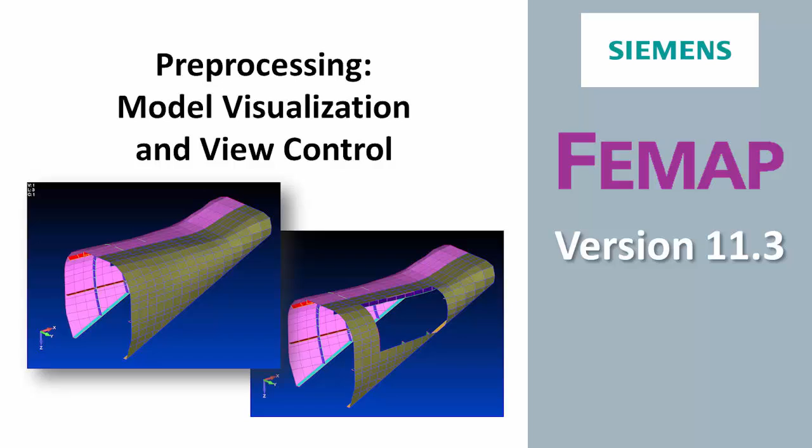In this video we'll be looking at some of the new pre-processing enhancements for model visualization and view control, starting with the Draw Erase toolbar, which provides a simple way of displaying or hiding parts of the model. Sometimes called Plot Erase or Show No Show, Draw Erase is a quick way to turn on or off parts of the model without having to set up groups or layers. Let's use this sample model to see how it works.

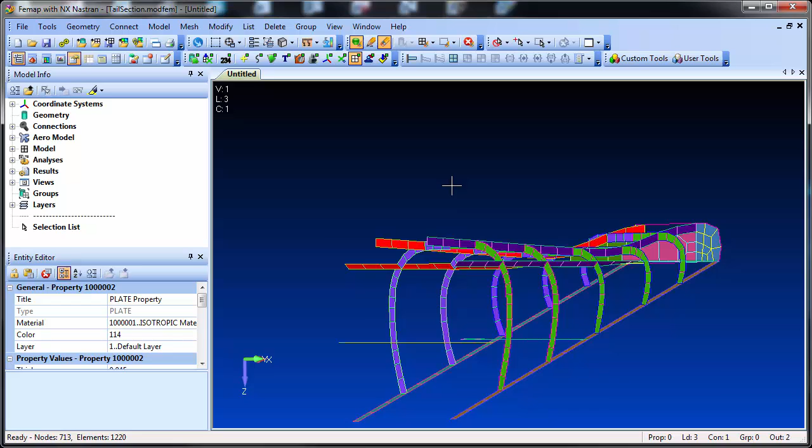The Draw Erase toolbar can be set to be active or not, and you can use it to draw or erase geometry or elements according to various criteria such as materials or properties. In this case, we're switching off elements that have a particular property. You can also flip between what's drawn and erased so that entities that were drawn are now erased and vice versa. And once you're done, you can easily reset the tool.

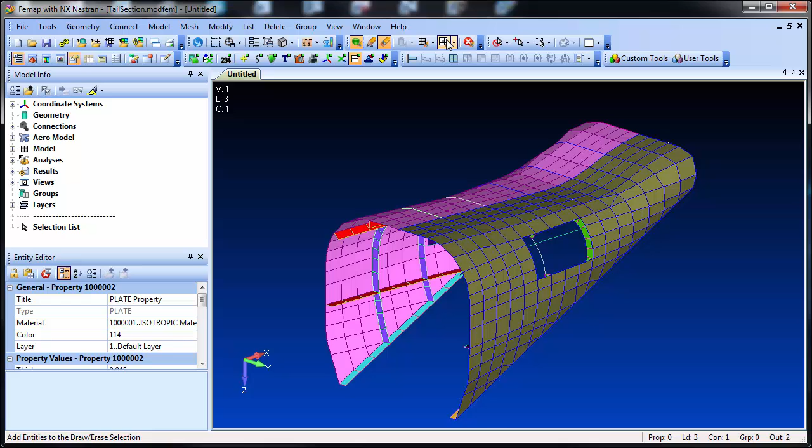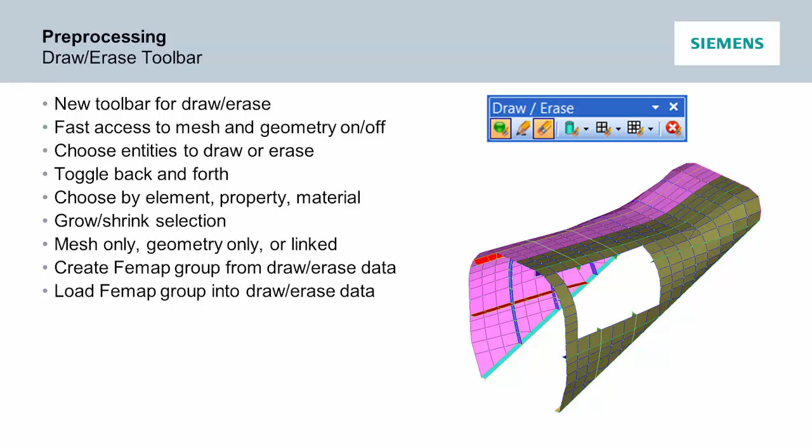There's also an element mode if you want to select elements one at a time, and there are some other tools such as growing, allowing you to grow or shrink the erased section interactively. Draw Erase provides an easy way to hide part of the model to allow you to look inside. Other capabilities allow you to link the geometry and mesh, so if you turn off geometry, all the associated mesh will turn off at the same time. You can also save what you're viewing into a group for use later on, and you can load an existing group into the Draw Erase tool.

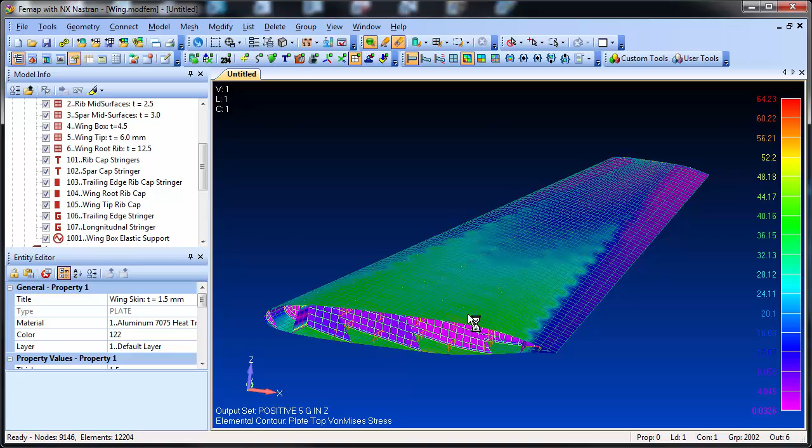In previous versions of FEMAP and many other pre- and post-processors, when you zoom into the model, you just keep getting closer to the view of the outside elements or geometry. You never go through or into the model. Walk-through is a mode where you can actually go into the model, turn around, and see what's behind you. This greatly aids visualization as you can view the interior of the model without having to create groups of entities to hide or blank off.

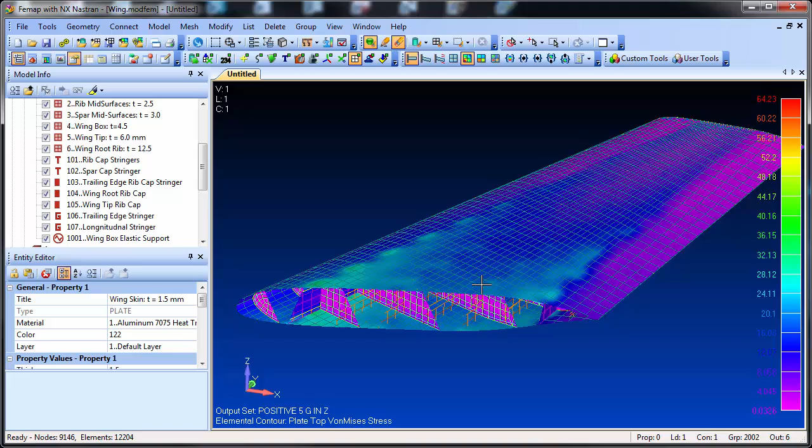Let's take a look at this wing model. By zooming in, we can now get inside the wing and turn around and view the structure that's behind us. You can also view results and deformations in this mode, and see the results as they are inside the model.

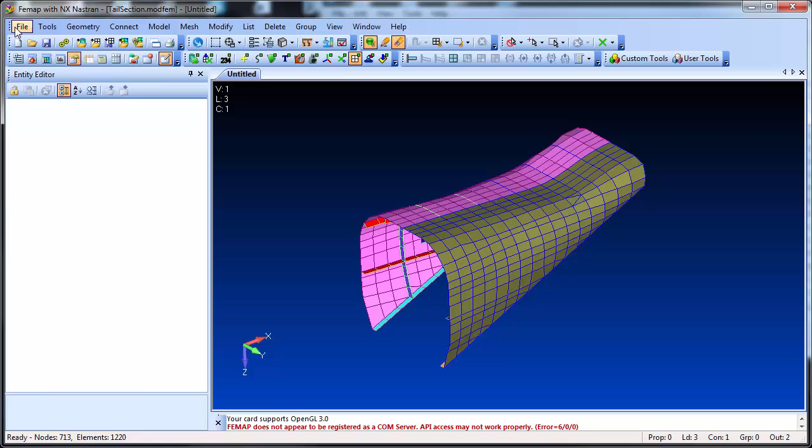Version 11.3 sees some fundamental changes to the way you can rotate and view the model in FEMAP. In previous versions, you would pick a rotation point or, by default, rotate about the view's center. With these methods, sometimes rotating about these points would cause the model to move off the screen completely. To fix this, a new Rotate Around Cursor method has been introduced. A point in the model closest to the position of the cursor when the rotation command is initiated is the point around which the model will be rotated.

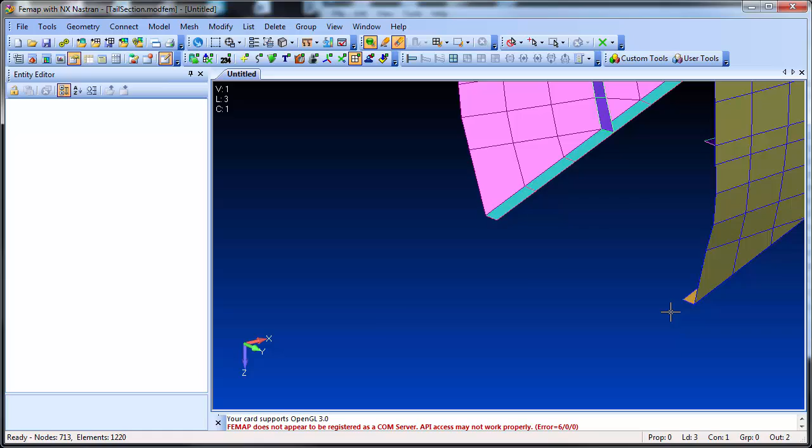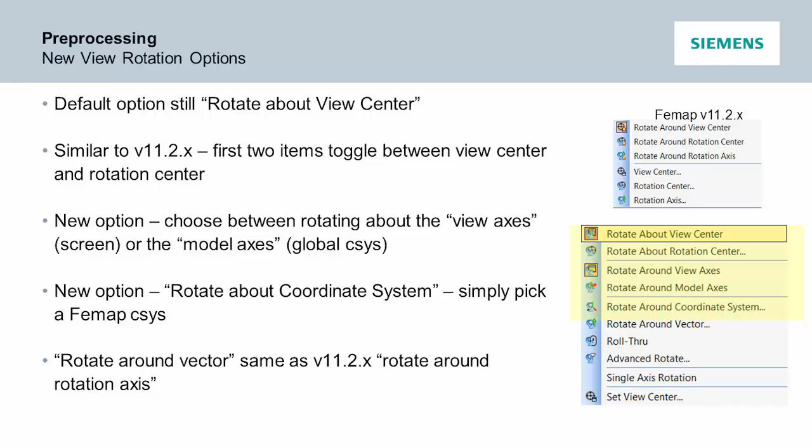This means when you are zoomed in doing some detailed work close in on a part of the model, you now have much better control of the view rotation, and the model will not spin out of view. Again, you can opt to turn this new method on or off to use the older methods if desired. There are some other rotation options that have been added as well. You can now specify a coordinate system to rotate about so that you can use the X, Y, or Z axes of any coordinate system in the model, which allows you to rotate the model around a local axis.

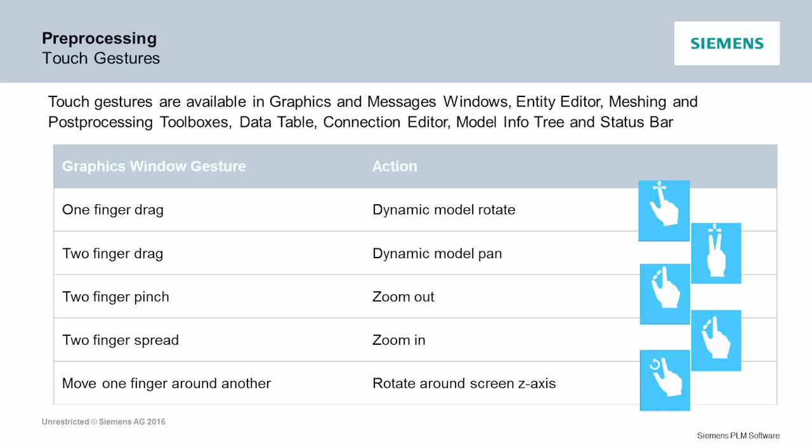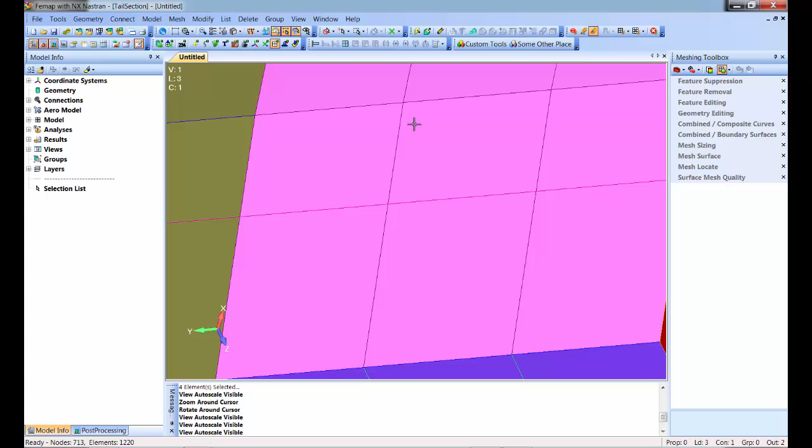FEMAP 11.3 now has more support for the touch interface, including two-finger panning and zooming, etc. With this methodology, you always zoom about the center of where you are picking, and a similar approach for the mouse has now been introduced into FEMAP. You can now switch on Zoom Around Cursor, and instead of zooming about the center of the screen, you can now zoom about a point in the model closest to the position of the cursor. Like Rotate Around Cursor, this gives you much more control over model zooming and positioning, and you can opt to turn it off if you prefer the previous method of model zooming.